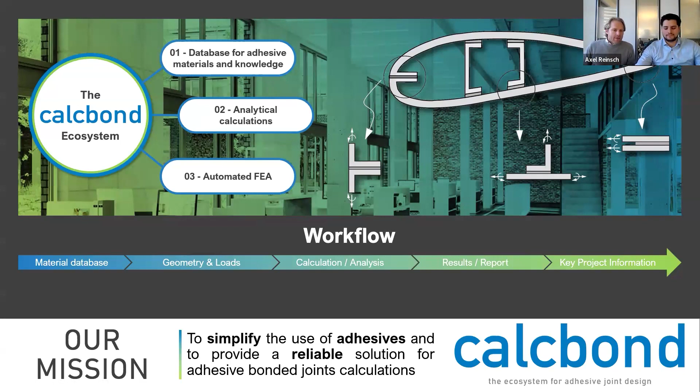That includes 3 major fields. One is the database for adhesive materials and the knowledge to work with that and with calculations on the platform in the wiki. The second field is the analytical calculation itself. We have one area, I'll show that in a minute, where you can undertake analytical calculations, type in your data and go. And the third field is the topic why we are here today, and that's the automated FEA. So let's go online and see how it looks and try it out.

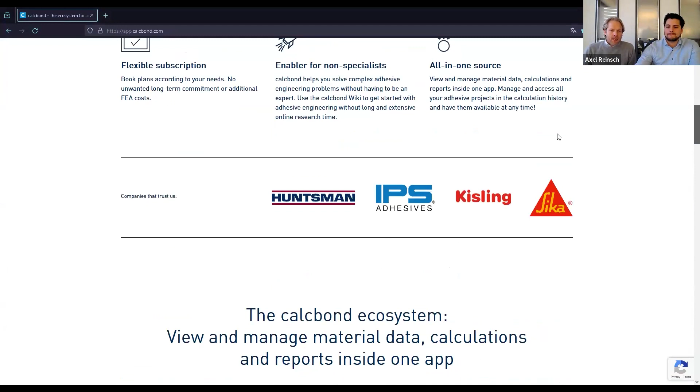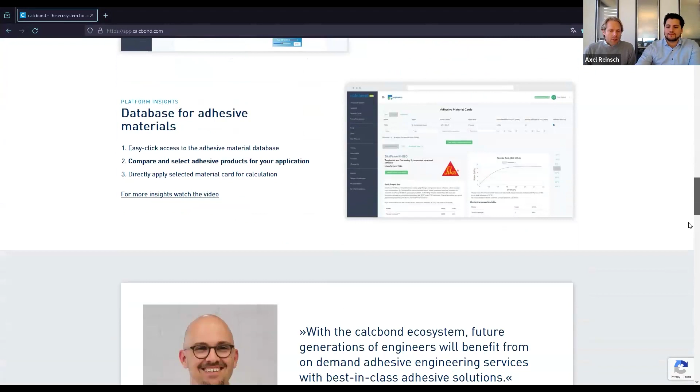All right, so when you go on www.calcbond.com, you will see this landing page here. If you scroll down, you see a quick introduction about what you could expect once you have registered on the platform. Here are our cooperation partners, Huntsman, Sika, Kisling, and IPS Adhesives. Further down, you can see some videos that you can click. We have a YouTube channel that you can explore. If you want to register, you can click on the 30 days free trial, and you will be led to a first field of information.

You enter your email address and you have to create a password. You have to confirm your email address from your email account, and then you get to a second input field to enter some more information about yourself, and then you'll be led straight on the platform. We can skip that because luckily we are already registered. So Fabian just quickly enters his information, and here you go.

We land on the index page of calcbond, and the platform is organized in a way that you have on the left-hand side your navigation bar with all the different fields and information areas that you can explore. And in the middle, you have the workspace where everything takes place.

So first of all, let's imagine you have just registered and you want to see where all that information went to. You can go to your user portal on the left-hand side, roughly in the middle. And here is your personal data stored, and you could edit and change everything that you have entered in case you want to. And later on, you could as well, because you started as a free user, as a trial user, and you don't have to pay anything here.

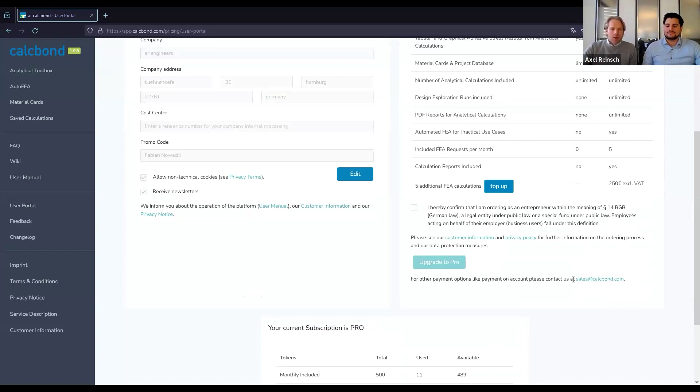And if you don't decide to buy, and that's very important for us too, to say that there's no trap. If you don't want to get anything on the platform, you will be downgraded after 30 days automatically to a free user, and nothing has to be paid, of course. Once you decide actively to top up or to go to a pro usership, you can do that actively here. You go to upgrade to pro, and then you will be led through the process, or simply send us an email. Of course, that's always possible.

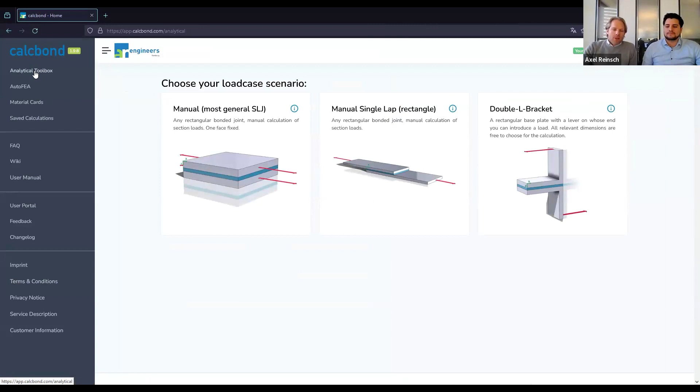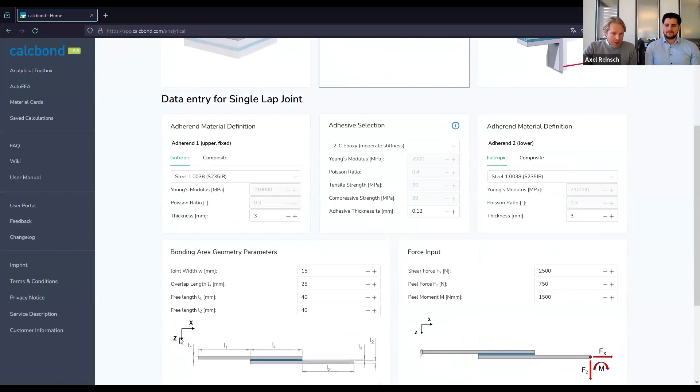Okay, so far from the user portal, and let's go top down with all the features on the platform. First of all, as I said, we have the analytical toolbox here. That's very straightforward. Analytical toolbox means a very simple approach to have a very clear and simple first calculation feature, and you enter your data, your material data, your geometry data, and you can click calculation, and within half a second you get all the information, a summary of what you've entered, and the output, of course, the results, and so on.

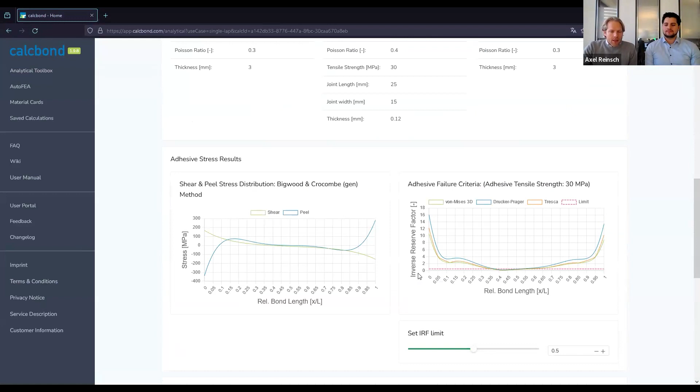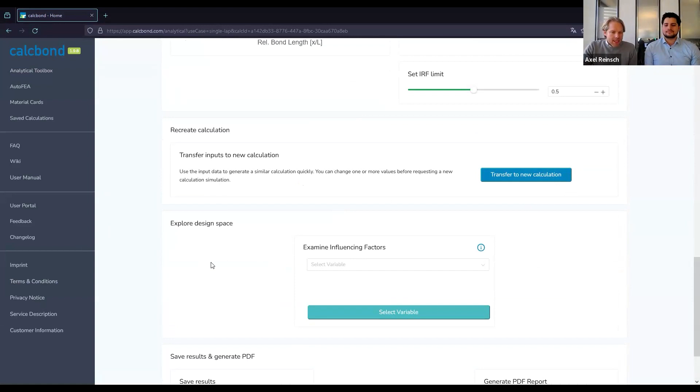If you want to change something, you can transfer to new calculation, do that again. You can explore your design space because maybe you want to play with the adhesive thickness, for example. You can do that with the design space explorer, or if you want to save that, you can do that here with saved results, and you can generate your report here on that button.

We will go into detail with all these functionalities on the analytical toolbox in one month's time, on the 29th of February with the second webinar, but we'll say that again at the end of this webinar. So that's the analytical toolbox.

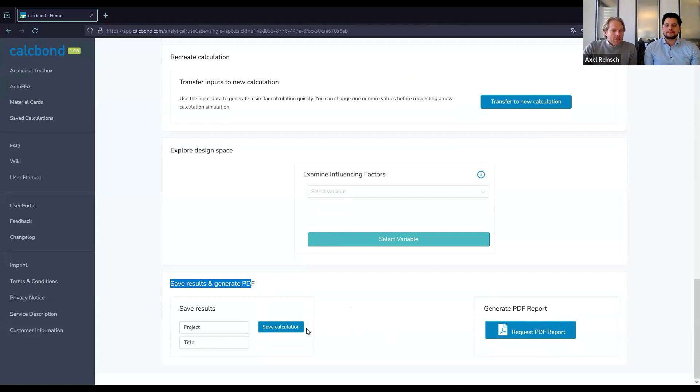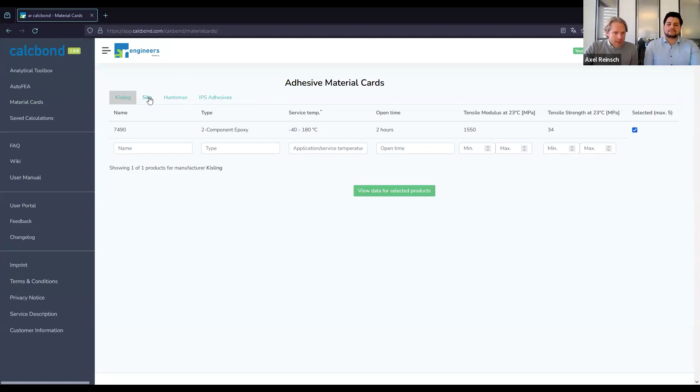Another very important feature for us is, of course, the material cards section, because here you see our cooperation partners who provide material input data, material information for their adhesives. So we have Kisling, Sika, Huntsman, and IPS adhesives on the platform. You can explore them, for example, ticking the box here, the first one from Kisling, you take the first one from Sika, just to give you an idea of how that would look.

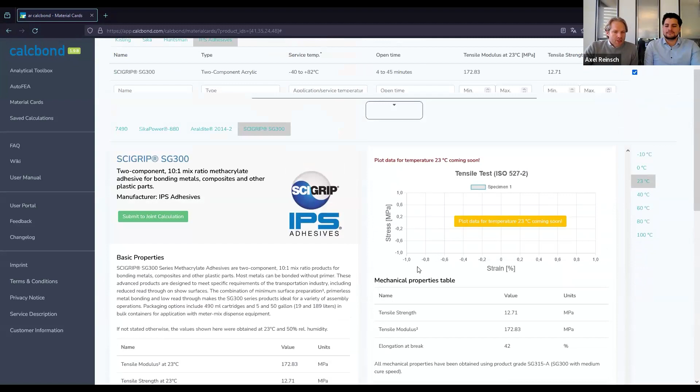You take one from Huntsman and one from IPS, and then say view data, and you will get an overview of those materials you have chosen on another level, and research all the information that has been selected. If you want to use something for a calculation, you can go straight to submit to calculation. You will be led back to the analytical toolbox with that material.

All right. The section AutoFEA and saved calculations will be explained by Fabian in detail. And yeah, I think that's it from my side so far. You find more information, of course, here in the legal area where you can read our terms and conditions and all that stuff. One thing I forgot, of course, very important, the wiki.

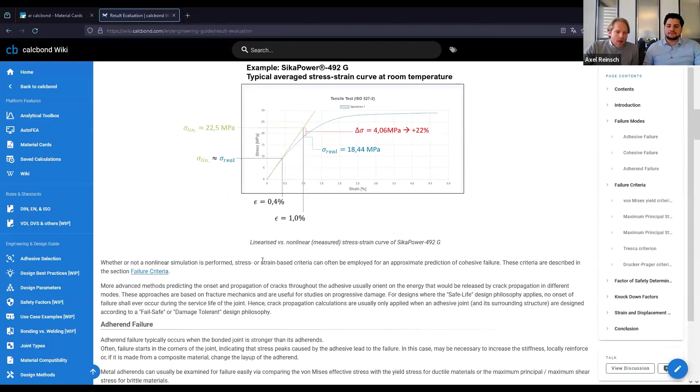As I said in the beginning, we provide knowledge not only for our platform, all the information on how to use it and make use of it, but as well general adhesive engineering information. So if you go on our wiki, you can explore that and go through all these very interesting topics. Let's pick one, for example, result evaluation. If I just scroll down, you see there's a lot of description about what you could expect from the platform, and as well what we do in the background and how you could work with that.

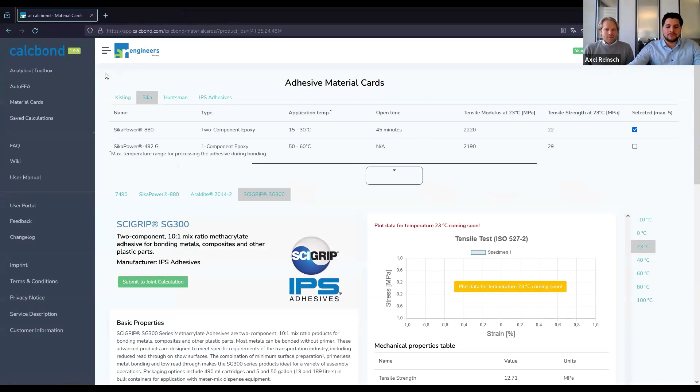And so now let's dive deeper into the main topic of this webinar today, the AutoFEA feature. The AutoFEA feature is a very powerful toolbox which enables you to perform in-depth 3D design analysis based on numerical simulation and suitable stress engineering methods for adhesive bonded joints, where we have implemented a set of predefined standardized adhesive bonding applications, which you can choose from to start off with your joint design analysis.

So here we have currently 5 different configurations inside the platform, starting with the bonded stud. So imagine a simply bonded fastener onto a planar panel of some type, or 2 profiles being bonded together, or coaxially bonded tubes also can be calculated here inside calcbond.

And as well, we have a more complex glazing application here, so a window pane of some sort, a planar window, or also a curved window, which is bonded into a frame, can be parametrically designed and analyzed here. And of course, also the standard single lap joint, which many of you might know from typical lab shear testing applications. This can be calculated inside calcbond as well. So for today, let me showcase you the methodology of AutoFEA with the bonded stud.

So if I click on the tile here, I'll be directly directed to the input geometry parameter section, which is divided into the description of the shape and size, basically, of the bonded stud. So here we have a stud which is, for example, welded onto a circular base plate, which is then bonded by an adhesive layer onto a base panel, which could be a side wall, for example, in a cabinet, or a vehicle, or a ship, or something similar. Also a roof or overhead bonded panel could be replicated by this.

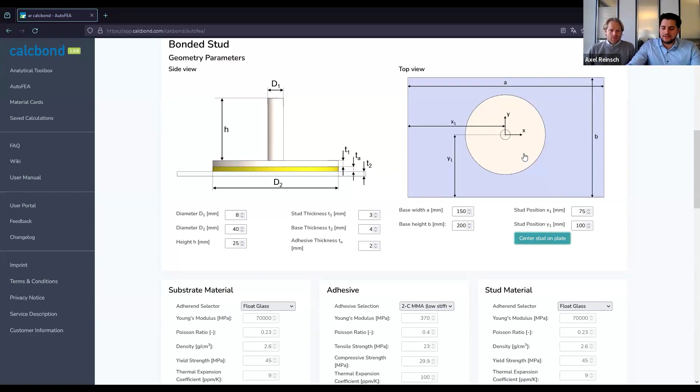Next, we have to define our material parameters, of course. So we have 3 components here, with the first one being the substrate material, so the base panel in this case. Let's say we have an aluminum, typical aerospace alloy, and the stud itself, the fastener, may be a standard steel alloy, which we want to bond, for example, with a SikaPower-880, which is a higher stiffness epoxy-based adhesive, which is suitable to bond these materials.

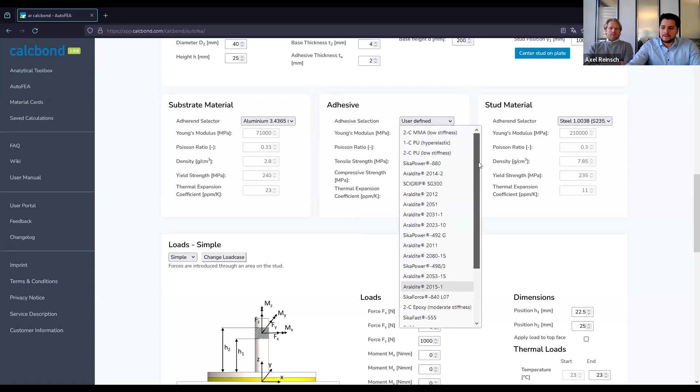And then you can see here the basic mechanical properties that are taken from the calcbond material database and used in the calculation here. If you want to calculate your own specific material, you could also go to the dropdown and select user-defined to type in your own adhesive mechanical properties. But for this demo, let's stick with this product here and move down further to the load section.

So every bonded joint, if you want to calculate how it behaves under pressure or stress or any other type of loading, you need to define loads and boundary conditions. So here we have two different examples. We have a simple loading situation where you directly apply a force or a moment or a combination of all of those at the bonded stud, in this case along the shaft here.

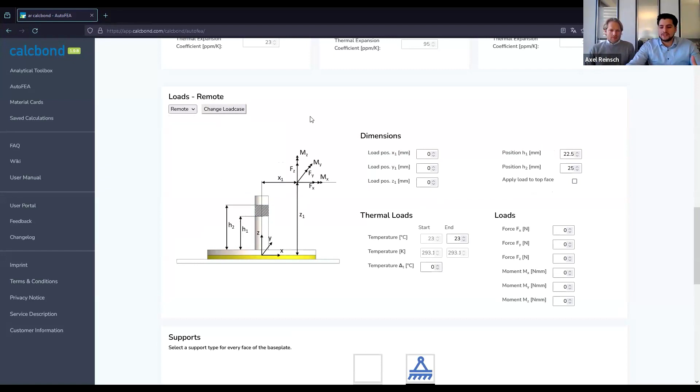Or you could apply a remote loading if you want to account for distances, for lever effects. For example, if you bond devices with an offset center of gravity, you could do that. But for now, let's stick with the simple loading. And let's say we want to apply a horizontal force pulling on the stud with 250 newtons. We don't want any vertical load here.

And we want to say the force is acting right on the top edge here of the component. And also we can apply a differential temperature. So if we want to see how would my joint perform not only under a mechanical load, but also a thermal load, I can increase the end temperature, so the operational temperature basically. And let's say we want to see how the joint performs at 65 degrees Celsius.

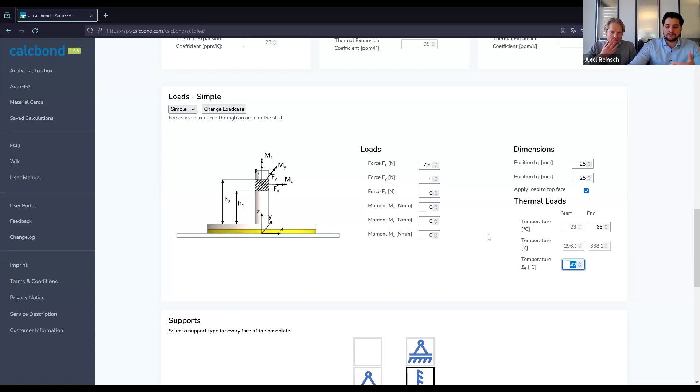I can do that, and then this will be implemented in addition to the mechanical force as a boundary condition where the thermal expansion effects of all the materials will be taken into account, and also the degradation of the properties of the adhesive material due to higher temperatures, or also maybe the improvement due to lower temperatures for some types of adhesives. Moving on, we have the supports.

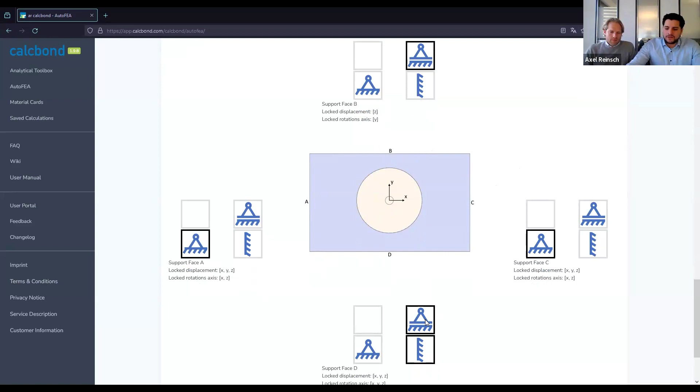So once we have fixed the input data for the forces and the geometry and the material, we need to define some type of supports which holds my components in place, basically. So here we can define different support types on every edge of this base panel here. So let's say we want to fix the left and the right edge with the simple support, so only the lateral and vertical movement is fixed, but rotations may be free. And let's say the upper and the lower edge in this case, only the vertical movement will be fixed, but everything else will be kept free.

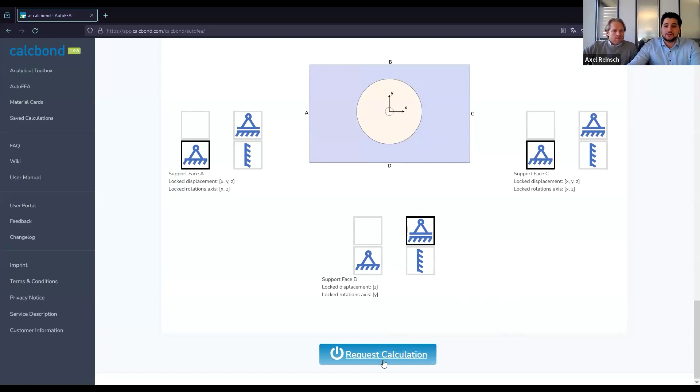So once we have defined this, and also don't worry, calcbond automatically checks if your boundary conditions are suitable. So if you would have still rigid body movement, for example, the system will notify you so you don't run into the risk of sending off a calculation request for something that couldn't be calculated. Okay, then you're done, and you simply submit your calculation request by clicking on the big blue button here. And then your submission will be processed, and on the bottom you get an information box which keeps you up to date about the progress.

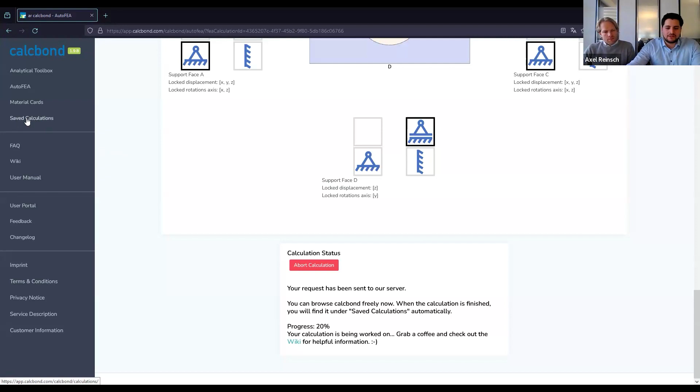So now the request has been sent to the server and will be worked on back at the AR engineer server in Hamburg. And when the results are finished, you can see them online in the platform. So you can either leave this window open and wait, or roam around freely on the platform in the meantime, and then just go back to your saved calculations area here on the left, where you get an overview table for your analytical calculations that you've done in calcbond. But also, if you click on the second tab, your numerical calculations, so the AutoFEA calculations. And right down at the bottom, I'll see, okay, my most recent calculation is still in progress. And once it's finished, I can have a look at it.

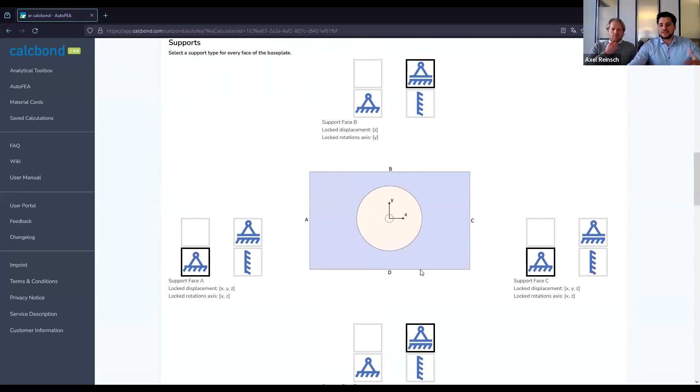For example, in the demo I did before, I just click on the link here of the project name, and it opens up my calculation. And when I scroll down, as you can see here, I have the result overview just as an additional section below my input parameter section, which shows all the statistics of the calculation model. So if you're a little bit more familiar with numerical calculations and finite element analysis, you can check the parameters of the model here. You can also check the most important result values here on the right-hand side.

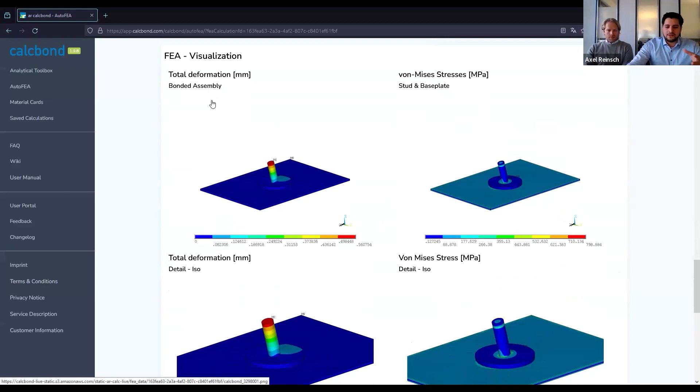And of course, the visualization of the 3D analysis results for the entire assembly. So the deformation, the stress distribution on the right, also a little bit more zoomed in, and also isolated stress and strain results for your specific adhesive layer. So in this case, the example before was a bending problem. So you can see there's lots of bending going on in the adhesive layer here in the middle, and that is well represented within the stresses.

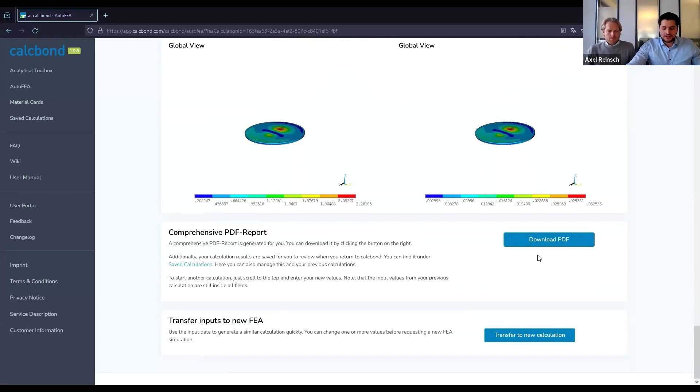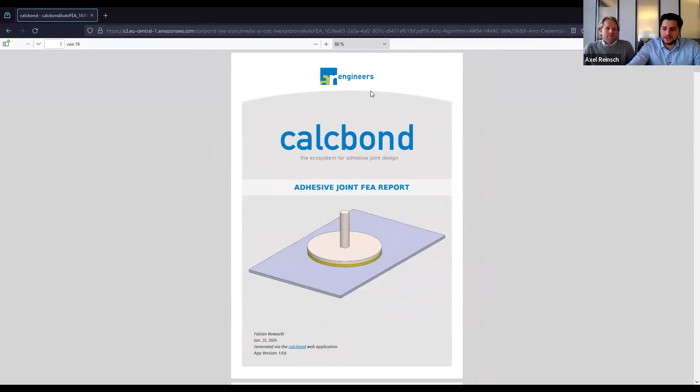Okay, and if I want to view the results in a summarized document, I can do so by clicking the Download PDF button. And then my PDF report with the specific calculation will be generated and will be ready to view and also to save offline, for example. So here I have a cover page with the most important information about the user and when the calculation was done. I have an interactive table of contents, so I can jump in between the chapters.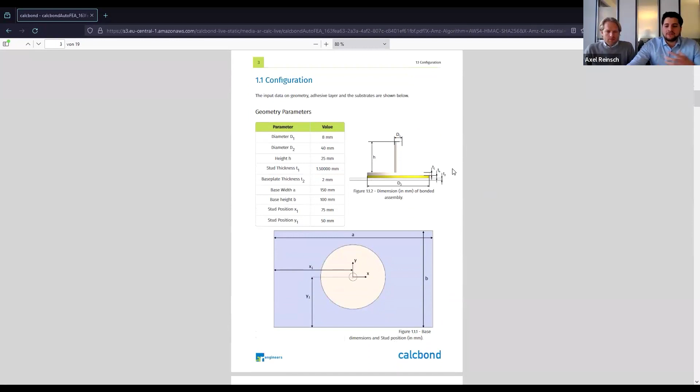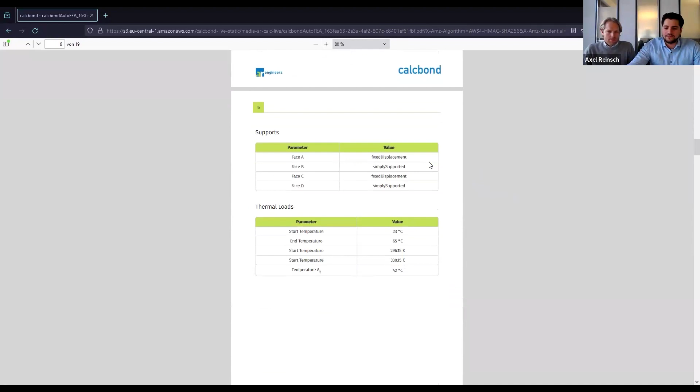And it summarizes everything from the setup of the simulation with your input parameters through the material data, the forces and boundary conditions of your components, and then a little more in-depth and specific engineering properties for the adhesive, because of course that's what we focus on in calcbond, the adhesive material and the mechanical properties used for this calculation. And if you choose a manufacturer-specific product, you also get a QR code with a direct product link to the website of the provider to get to know more about this specific product.

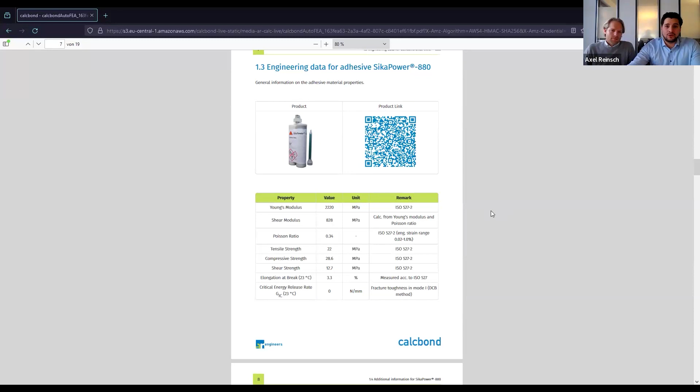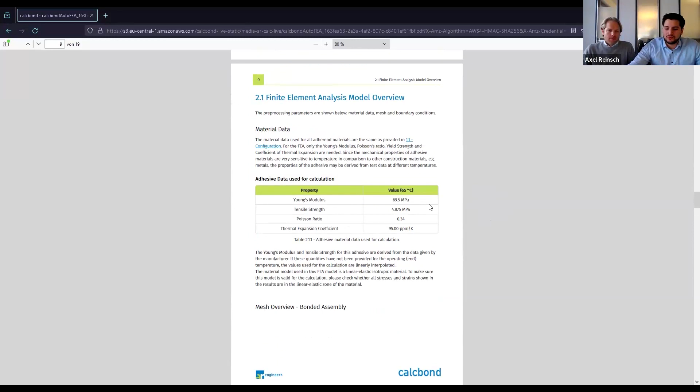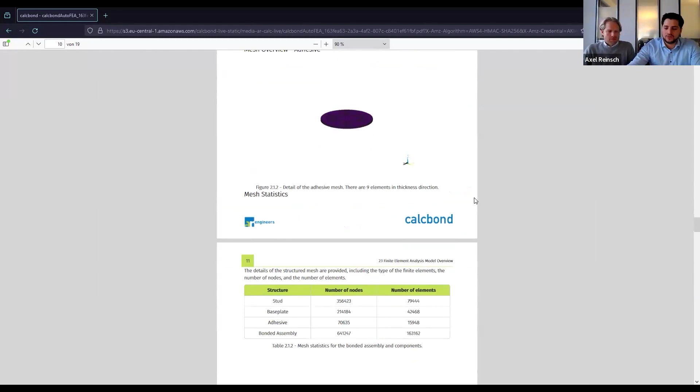And then in the AutoFEA report, you get more information on the analysis model with the properties being used for the analysis of the adhesive, the analysis model itself, so the finite element mesh. If you zoom in a little closer, for those who are familiar with FEA, they can check on the model quality, the mesh quality if they want to, and some more statistical values, number of nodes, number of elements.

And then finally, of course, the results. So here a little more extensive than on the online interface, the table with the maximum deformation values, stress values, strain values, and the plots, of course, that you've seen before.

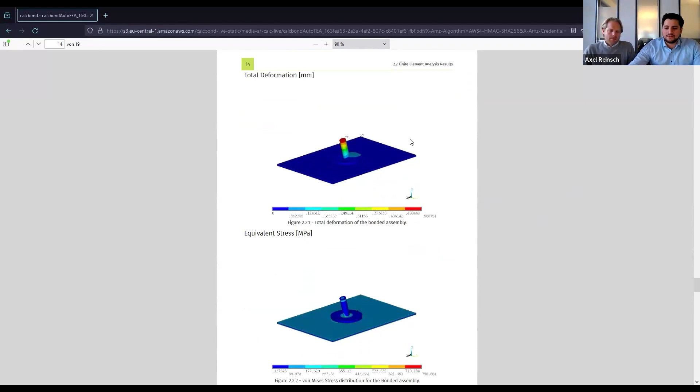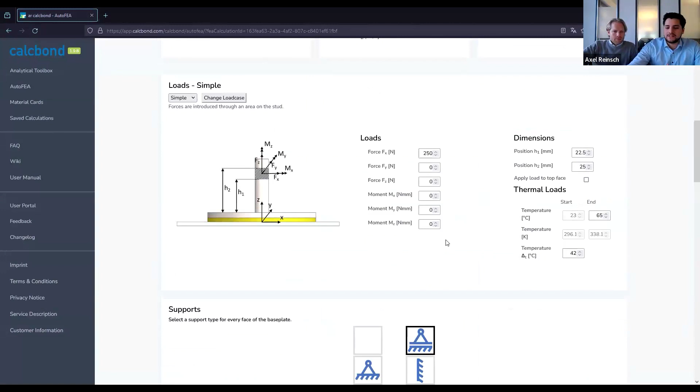We find some general remarks, and on the final page, some important information, some links to the platform, a contact person also for the adhesive material, and a specific link to the calculation. So this is very interesting. Even if you share this document with colleagues, supervisors, or clients, you can directly click this link to get back to the calculation inside calcbond, even if it's from somebody else, as long as you are a calcbond registered user, or just scan the QR code with your phone or with your tablet here. So I'll click on this link here. And now I am back inside calcbond and can view this calculation live.

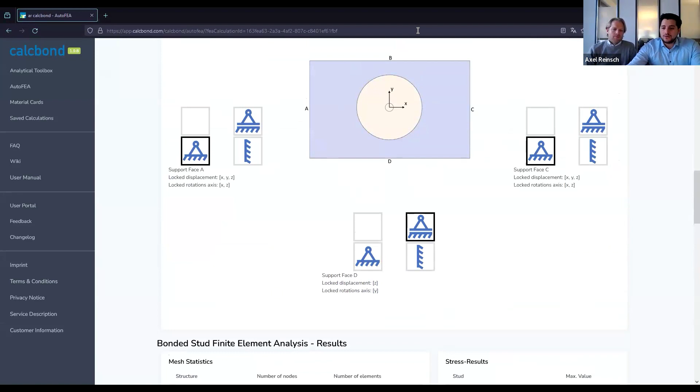Okay, so that is how you work with the AutoFEA module. I'll now switch back to the slides. Just a second. And there we are.

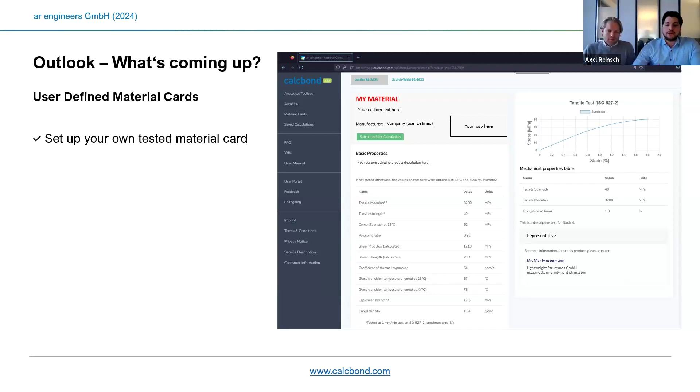So of course, we've been working intensively in the past weeks and months, and also are still working intensively on some future updates for the platform, with the first one, very exciting one, being the user-defined material cards. So we want to provide not only specific material data for products on the market and given by the manufacturers, but also we want to enable you as a user to set up and save your own material data inside calcbond. So for example, if you have test values for products that are still not provided by calcbond by default, you can upload them and save them and also share them there. So you will stay in full control of who sees the data, and nothing sensitive will be in the wrong hands, basically. So that is very exciting and coming up soon.

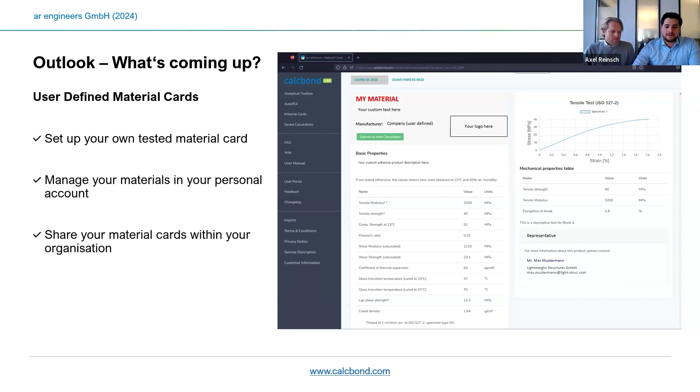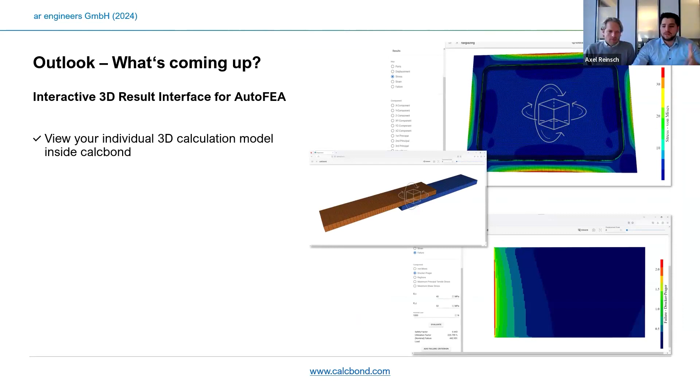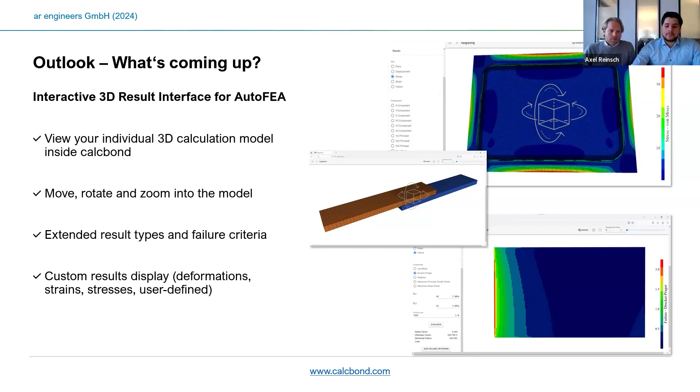Then we have an interactive 3D result interface planned and in the final works, where we'll be able to see your specific calculation model inside calcbond more responsively. So you can view the model inside the platform. You can move it, rotate it, zoom into it. You can hide and display different components of the joint. So for example, if you would hide the adherends, you can take a closer look and zoom into the adhesive layer. You can access an extensive range of result types and specific failure criteria depending on the type of adhesive that you are working with. And you can define custom results and display them the way you like, and also integrate them into your PDF report just the way you need them.

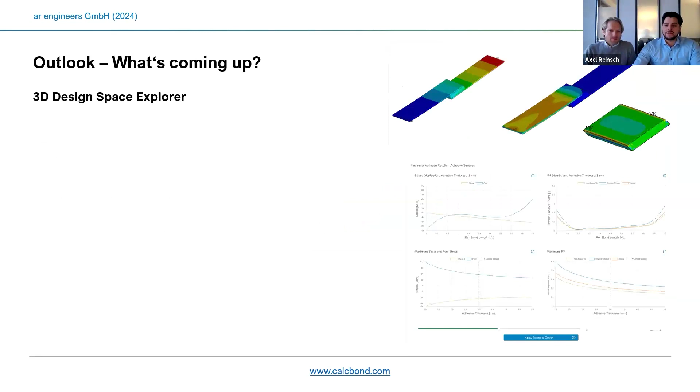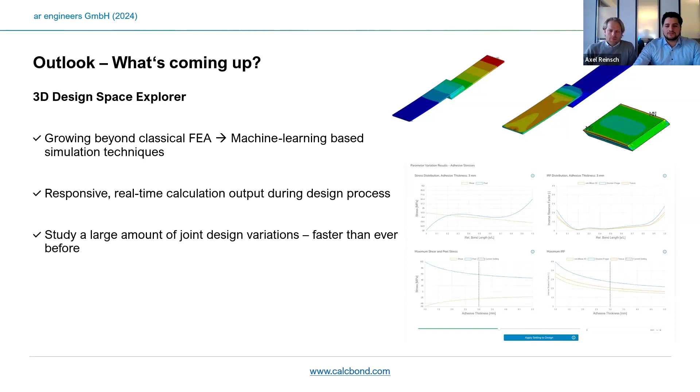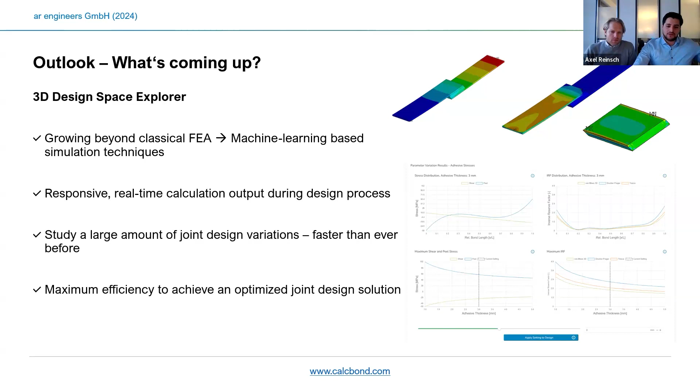And finally, we also want to improve the Design Space Explorer by implementing new methods that enable you to quickly perform design studies beyond classical finite element analysis based on machine learning techniques that boost the entire design study process. That'll allow for responsive real-time calculations as you change your parameters, basically. You can study a large amount of variations of your joints within a matter of fragments of your typical study time. And this enables maximum efficiency, of course, for you. So you will be on the way to an optimum joint design within a matter of seconds or minutes compared to your older design methodologies, basically.

Okay, so that's it from me, and I'll go back to Axel now to sum it up. Thank you, Fabian, for that great presentation of the platform live. Actually, you have seen how straightforward it is on calcbond to get your calculation on the way and get even your report done that you can send around as well.

We have seen the wiki, where you can actually explore the platform, but as well study adhesive engineering, and that's amazing.